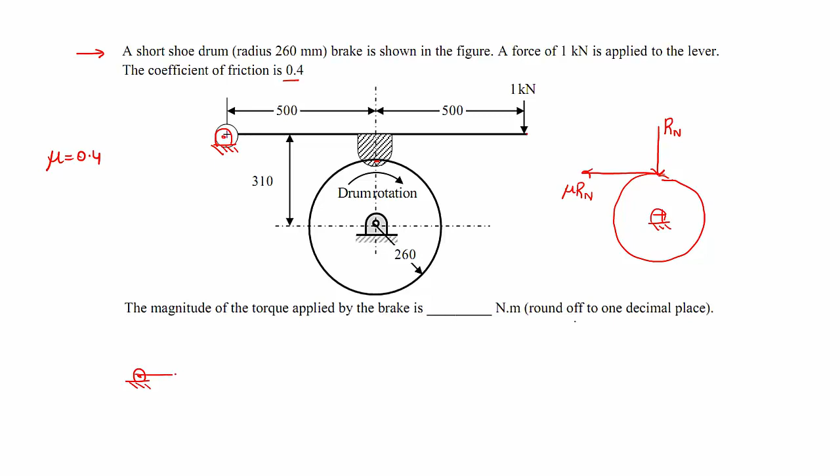Now the free body diagram of the lever. On the lever the active applied force is 1 kilonewton, and at a distance of 500 mm there is another force Rn acting.

The friction force will be opposite to this, mu Rn, pointing towards the right hand side. So here first of all we need to take the moments about the hinge point O.

Solve for Rn and mu Rn, then we can get the braking torque.

The radius of the drum is 260, and the location of the lever is 310 mm. So the width of the shoe will be equal to 310 minus 260, which is equal to 50 mm. So the friction force will be acting at a distance of 50 mm from the hinge point.

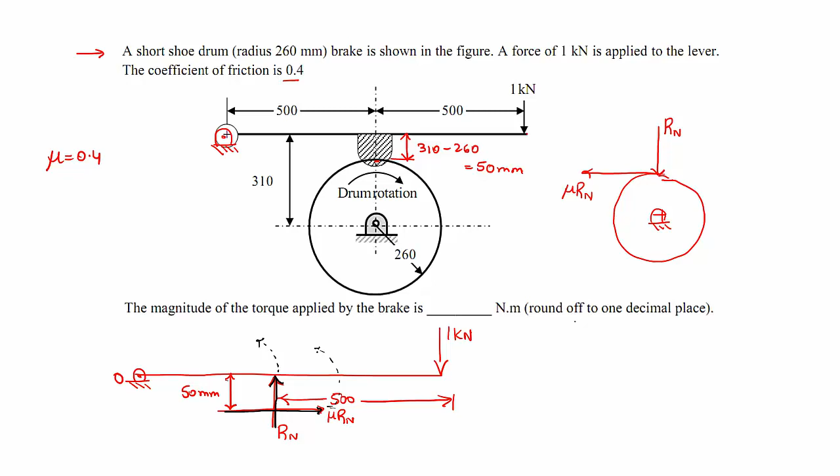So this is about O. Rn will be in anti-clockwise sense, and mu Rn also will be in anti-clockwise sense. So this is equal to Rn into 0.5 minus mu Rn into 0.05 equal to 0.

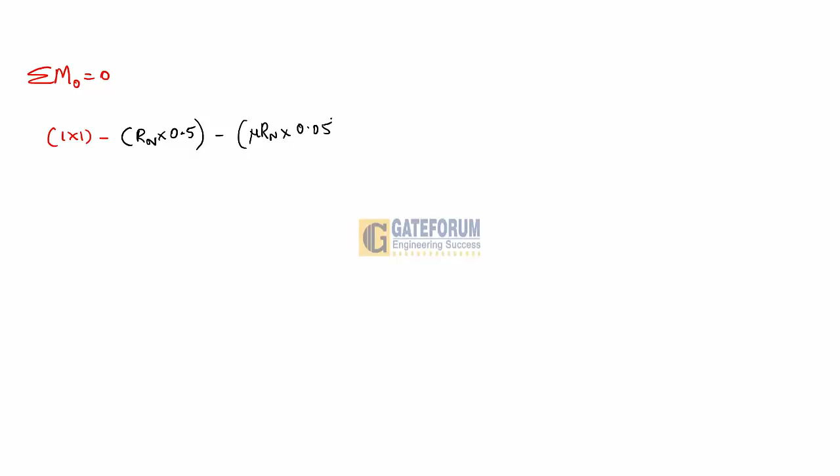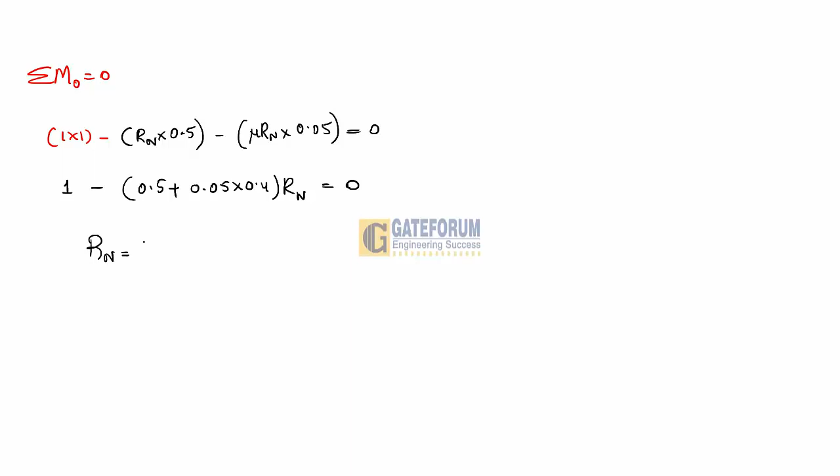So Rn here will be equal to approximately 1 by 0.52 kilonewtons, which is equal to 1.923 kilonewtons. Torque will be equal to mu times Rn into radius. Mu is 0.4 into Rn is 1923 newtons, and radius of the drum is 260, or 0.260 meters. Upon calculating, this value is approximately equal to 200 Newton meters.

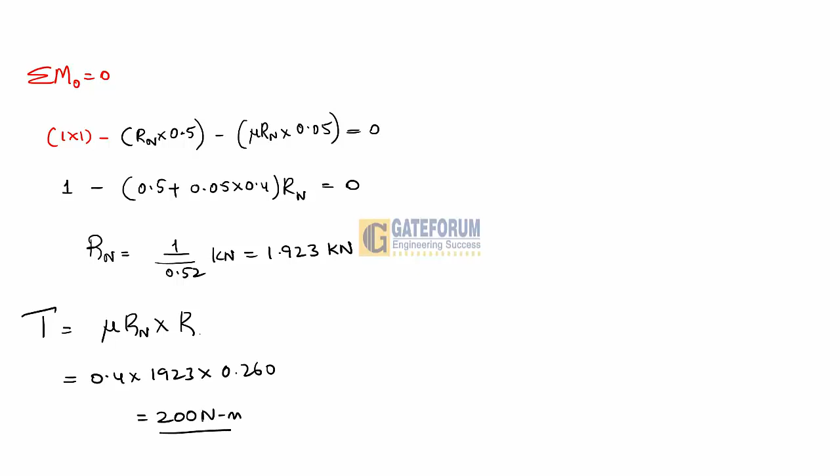200 Newton meters. So this is the end of the question.

This question is from the topic design of machinery, machine design, subtopic welded joints. Here a cantilever beam of rectangular cross section is welded to the support by means of two fillet welds.

A vertical load of 2 kilonewtons acts at the free end of the beam. Considering the allowable shear stress to be 60 Newton per mm square, the minimum size of the weld required is to be found. This weld will be subjected to two kinds of stresses.

One will be the direct shear and another will be the bending stress. So we have to use the maximum shear stress theory in order to get the size of the weld. First will be the direct shear.

Direct shear, that is tau is equal to load by area. Load by area, P is equal to 2000 divided by area. Here area of the weld will be equal to 2 times of L into H, where H is nothing but, or 2 times of L into T, where T is nothing but throat thickness.

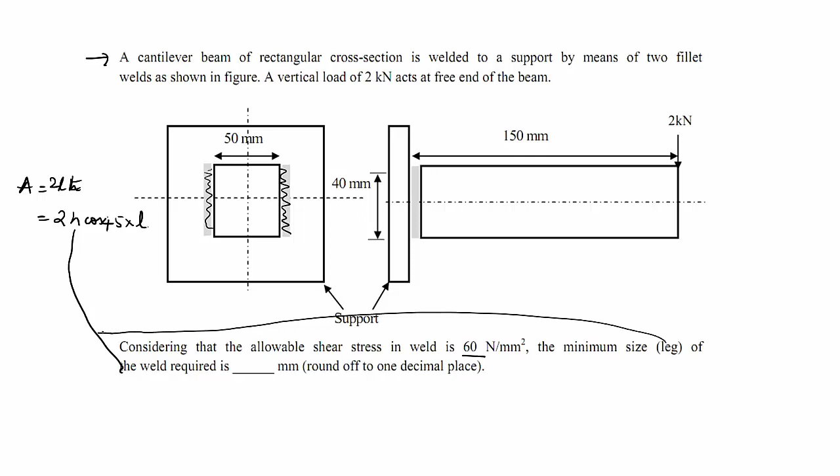Here they are asking us the minimum size of the weld. Even H is also minimum size of the weld leg. H is also minimum size of the weld, right? So let us do this.

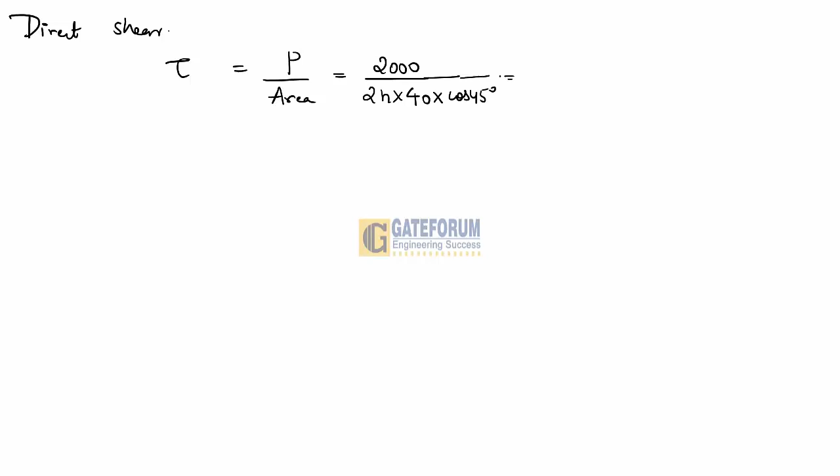So area here will be equal to 2 times of H into L. L is given as 40 mm. So 2 times of 40 into H into cos 45. So this will be equal to 35.36 Newton per mm square divided by H, which is the height of the weld leg.

Next is the bending stress, that is sigma is equal to M by I into y. Bending moment here is equal to 2000 into 150 divided by I.

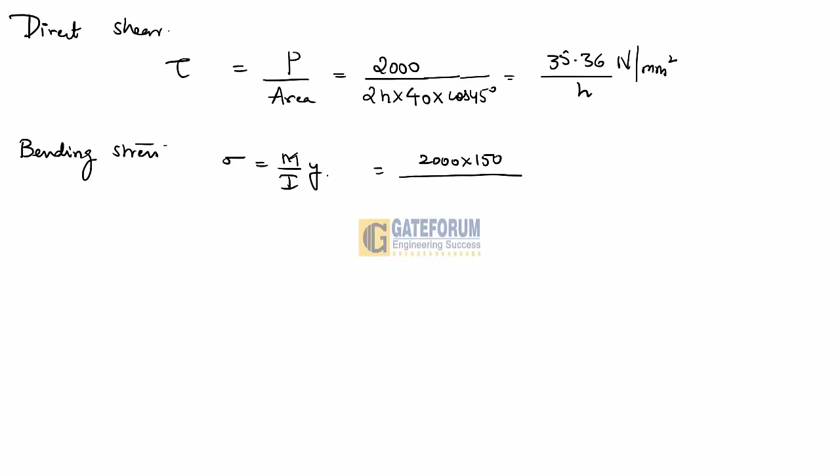Here I will be equal to, this can be treated like a rectangle. So here we can write for this as L cube into H divided by 12, or H cos 45. Like that we have two welds, so into 2 we need to multiply. So we are using the same formula, that is BD cube by 12 for the rectangle, considering this as a small rectangle.

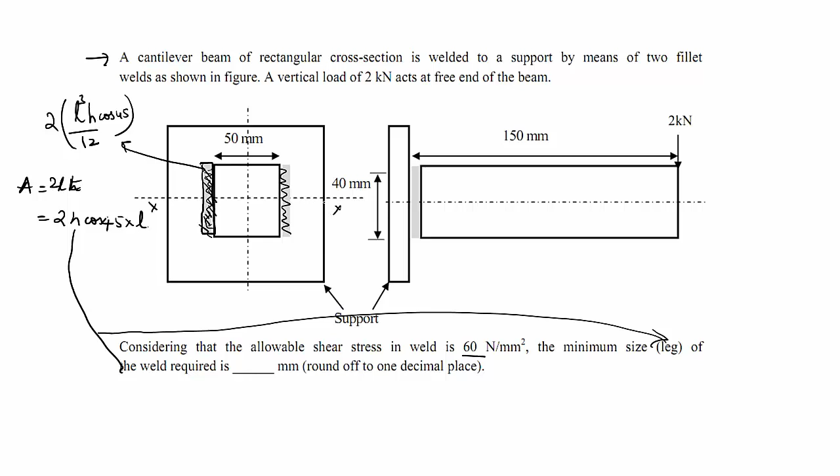So this will be equal to 2 into L cube, that is L is the dimension perpendicular to this axis, so it has to be cubed, into H cos 45 by 12. So there are 2, so multiplied with 2. So this will be 2 into L is 40 cube, into throat thickness that is H cos 45, divided by 12.

Into y, y is equal to 40 by 2. Into y is equal to, distance from the axis is equal to, y is equal to 40 by 2. So this will be equal to 795.61 divided by H.

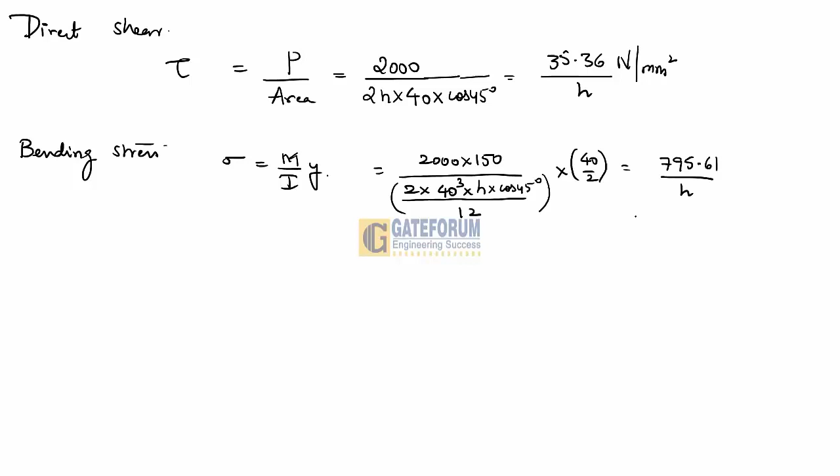795.61 divided by H. So maximum shear stress, that is tau max, is given as 60, which is also equal to root over sigma by 2 whole square plus tau square. So 60 is equal to root over 795.61 by 2H whole square plus 35.36 by H whole square.

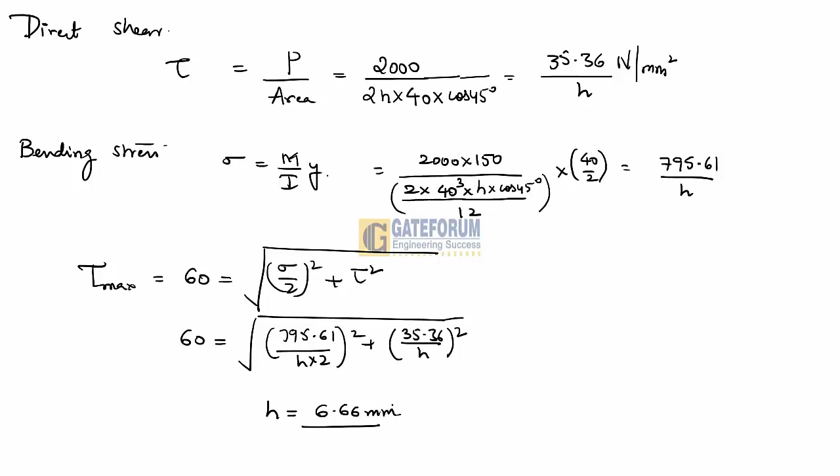So upon solving this, we'll get H equal to, that is minimum size of the weld will be equal to 6.66 mm. This is the end of the question. This question belongs to the topic machine design from the subtopic variable loading.

So machine parts is in the form of a cantilever subjected to fluctuating load as shown in figure. Load varies from 800 to 1600 newtons. Modified endurance limit is 200, yield strength is 500, and ultimate strength is 600 megapascal. So the factor of safety of the beam using modified Goodman's criteria is to be found.

So here length is missing. This is 100 mm, length is 100 mm, right? And now, so first let us calculate the maximum bending moment.

So maximum bending moment, M maximum, is equal to 1600 into 100, that is equal to 16 into 10 power 4, or 160,000 Newton mm, and minimum bending moment is equal to 800 into 100, that is equal to 80,000 Newton mm. Right, so this will be the bending moment.

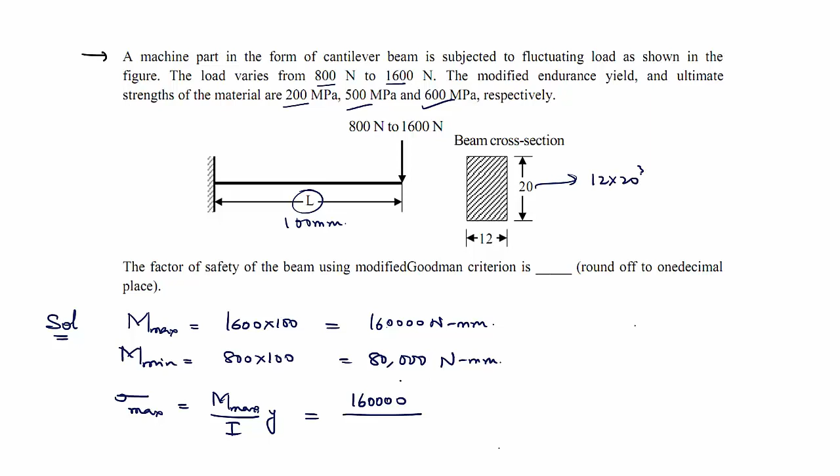Next, let us calculate maximum bending stress and minimum bending stress. So sigma maximum is equal to M maximum by I into Y. This M maximum is 160,000 divided by I, which will be equal to BD cube by 12, or 12 into 20 cube by 12, into Y will be 20 by 2. So this maximum stress will be equal to 200 Newton per mm square.

200 Newton per mm square. That is maximum bending stress.

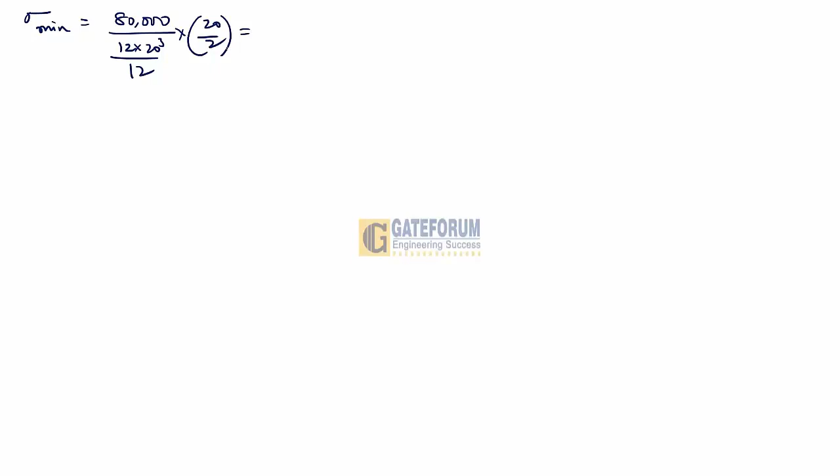Maximum bending stress, similarly minimum bending stress sigma minimum is equal to 80,000 divided by 12 into 20 cube divided by 12 into 20 by 2. So this minimum value of the bending stress will be equal to 100 Newton per mm square.

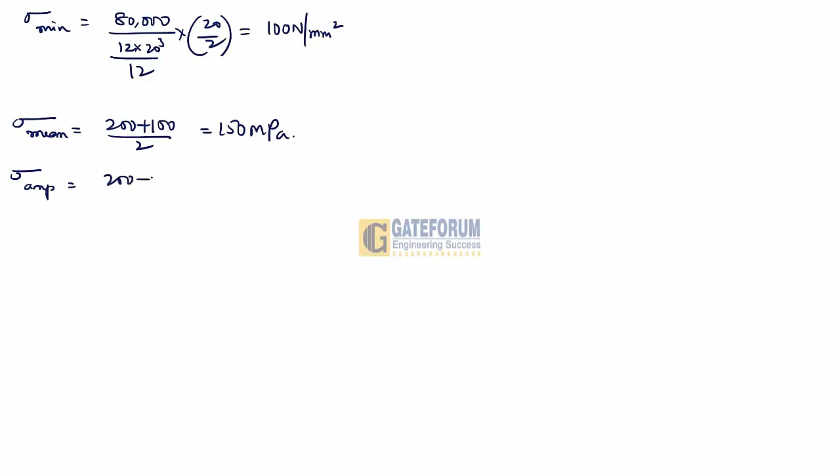So this will be the value of minimum bending stress, and average sigma mean is equal to 200 plus 100 by 2, that is 150 megapascal or Newton per mm square, and sigma amplitude is equal to 200 minus 100 by 2, that is 50 megapascal.

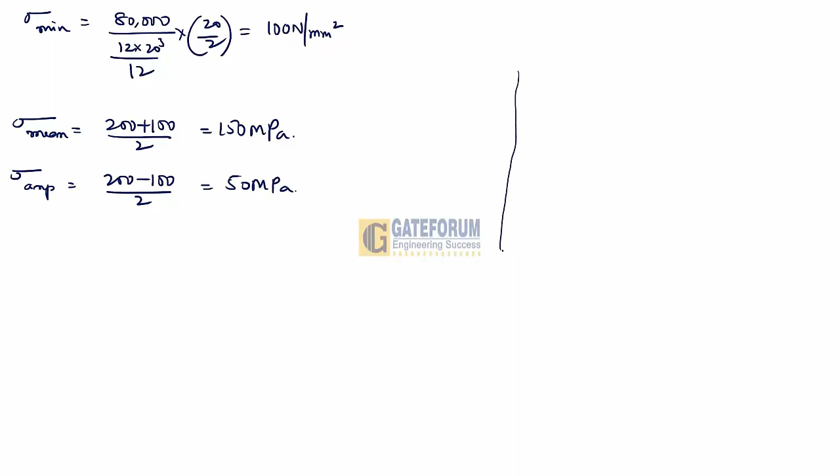Now first, in the modified Goodman's criteria, we have to draw the yield line and the modified Goodman's line. So here we'll have two equations, that is sigma mean by sigma YT.

Yield line means sigma maximum should be less than or equal to sigma YT. Sigma maximum should be less than or equal to sigma YT by factor of safety. What is sigma maximum? Sigma maximum is sigma mean plus sigma amplitude.

Sigma maximum, if I add these 200 and 100 will be cancelled, the result will be 200. 200 is the maximum value. So sigma maximum can be written as sigma mean plus sigma amplitude.

So this will be sigma mean plus sigma amplitude divided by sigma YT equal to or less than equal to 1 by factor of safety. Sigma mean we have as 150 divided by yield strength is 500, plus 50 divided by yield strength 500, equal to less than equal to 1 by factor of safety.

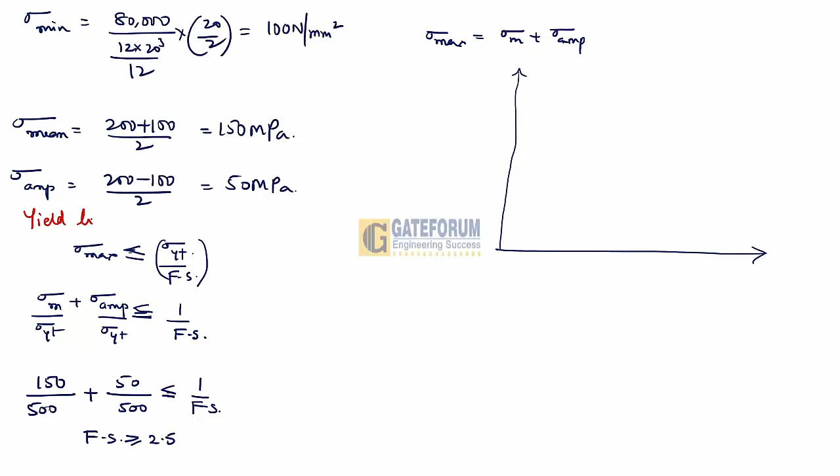So upon solving this, the factor of safety comes out to be should be greater than or equal to 2.5. So this is yield line, I have done for the yield line, that is sigma YT and sigma YT.

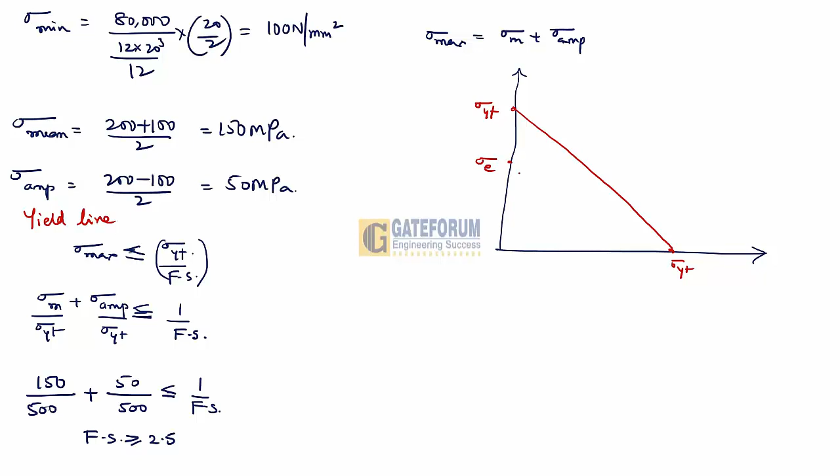Next will be the modified Goodman's line, which will be mapping between the endurance strength sigma e and ultimate strength sigma ut. So this area will be the modified Goodman's line. This is Goodman's equation, and this will be yield line.

So Goodman's line here is sigma mean by sigma ut plus sigma amplitude by sigma e is equal to 1 by factor of safety, or less than equal to 1 by factor of safety. So sigma mean is 150 divided by ultimate strength 600, plus 50 divided by endurance strength, which we are having as 200, so 50 by 200 less than equal to 1 by factor of safety.

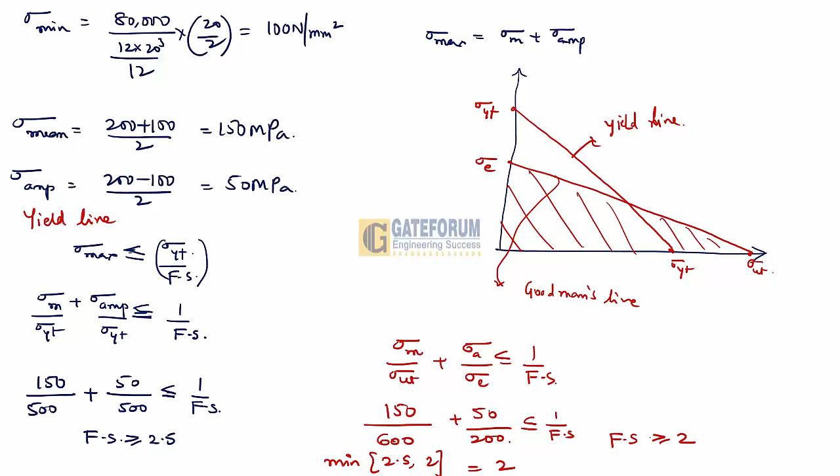So factor of safety for this case should be greater than or equal to 2. So now the factor of safety using modified Goodman's equation, you have to take minimum out of 2.5 and 2, which is 2. So minimum factor of safety has to be chosen here. So the correct answer is 2. This is the end of the question, from the topic machine design, subtopic springs.

So, stress distribution on the cross section of the coil wire. It is coil wire, not cool wire, coil wire, in the helical compression spring is shown in figure. The shear stress distribution represents dash.

So basically the helical spring will be subjected to two kinds of stresses. Helical compression spring will be subjected to two kinds of stresses. One will be the direct stress, so distribution will be uniform, and there will be a torsional shear stress. So combination of these two, what happens is that due to the addition of tau direct and tau due to torsion.

The location of the neutral axis will be shifted slightly away from the center. So this stress, this is tau T and this is tau D. These two will be added here, and then the magnitude of the shear stress here will be large, and these two stresses are in opposite directions, so slight reduction will be there, and we just need to join these two lines, because of which the center will be moved to some other location.

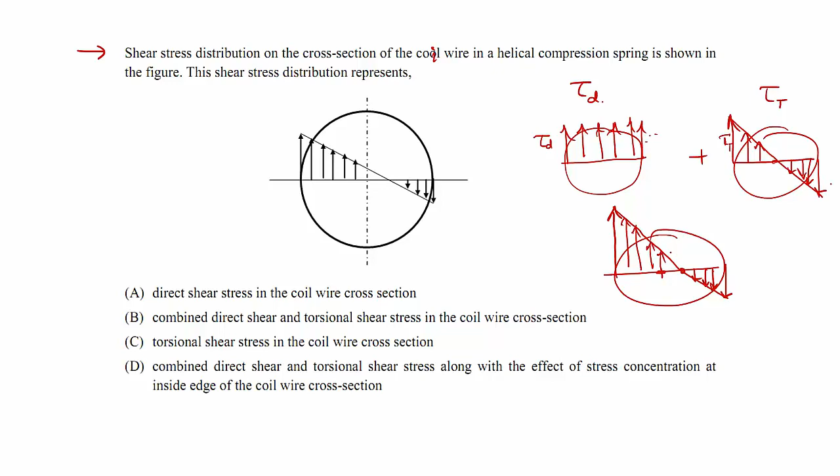Some other location. So this will be the shear stress distribution for combined direct stress and twisting stress, that is direct shear and torsional shear. So combined direct shear and torsional shear in the coil.

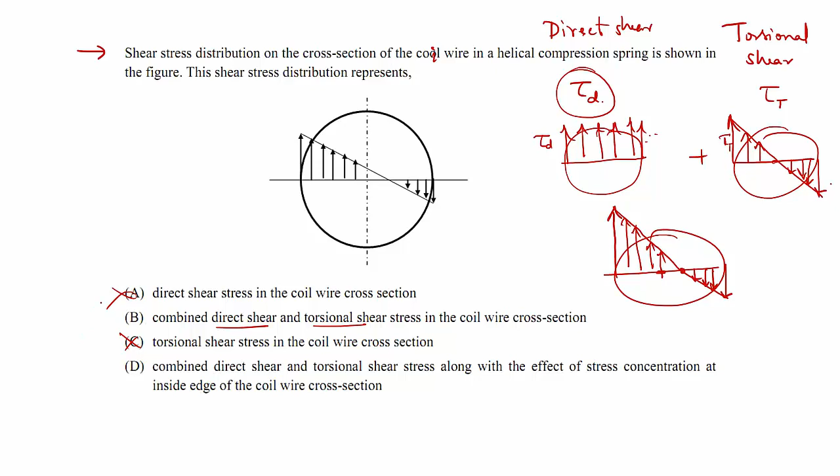So A is not the correct answer, it talks about direct stress only. C is not the correct answer, only torsional. And combined direct and torsional shear along with the effect of stress concentration inside the coil - here we are going to talk about combined direct and torsional shear only will be considered. That is option B. This is the end of the question.